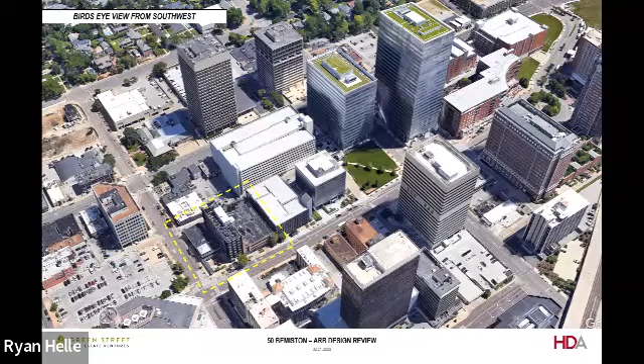Jerry had introduced with a couple of slides of just the context, and we can flip back and forth casually as we go through the presentation, but just the Clayton skyline, several views to reference towers that have been built or under construction. The site, big picture, bird's eye view from the southwest. So we've indicated the site dashed here in yellow at the northeastern corner of Carondelet and Bemiston. It's the existing Sterling Bank space in that corner plaza.

Zoomed in shot for context. So recently, I know Centene reclad this tower project and painted the existing precast parking structure. So we would be demolishing this collection of structures just to the west of that. The alley on the north end is where all the services will be accessed, off the northeast corner of our building.

The existing condition of Sterling is an access point, mostly masonry, pretty solid wall. As you step down, grade drops pretty quickly from the intersection of Bemiston and Carondelet as you move east down towards that Centene garage repaint and Centene office building recladding just to the east.

Our property line occurs approximately just right behind these bushes. There are existing on this corner 3 curb cuts to access 3 garage access points: one here at the northwestern portion of the site, and then 2 down along Carondelet, one here and one over here. This is a photo that is all kind of semi-combined.

So this is what we're proposing, viewing from the southwest corner, Carondelet on the right side of your page, Bemiston on the left side. I'll go through some of the massing concepts and sample diagrams of how we came to the structure you'll review tonight.

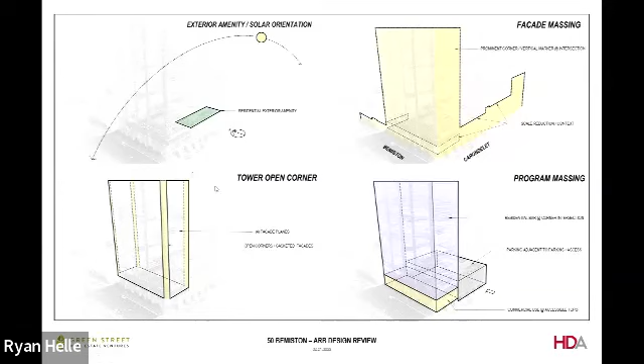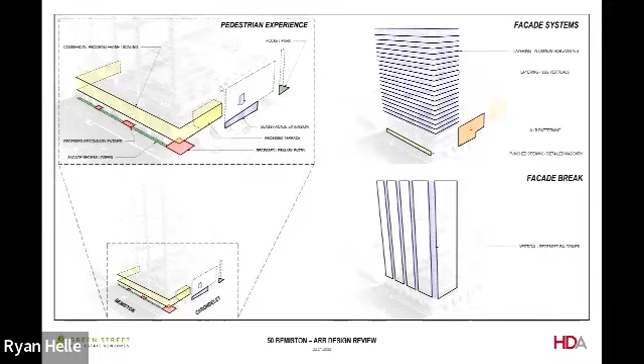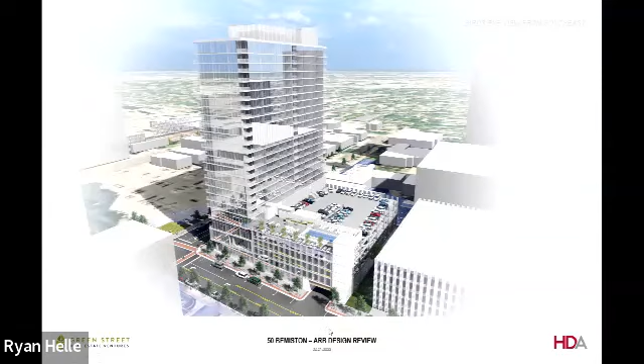This would be that pocket park location. And I think from there, Lee, I don't know if you want to continue.

And just... whoa. Sorry. Got it. All right, that's good.

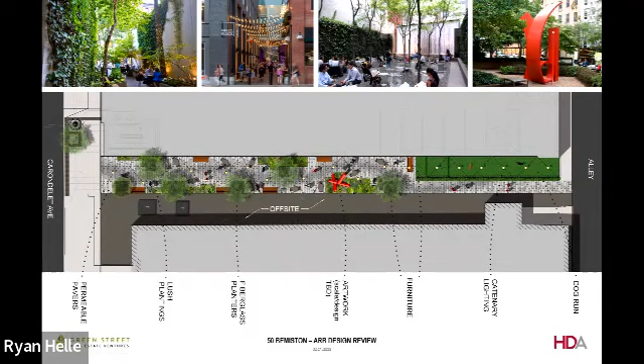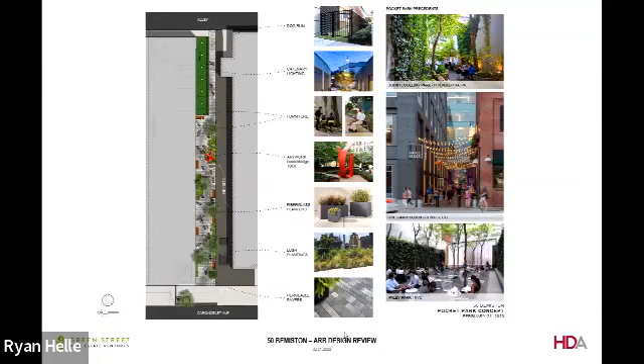Yeah, and I do have a PDF I could pull up and zoom in, it's kind of hard in PowerPoint. From my perspective, I think what you've done to landscape that 14-foot width is quite admirable, very attractive. I'm just trying to imagine the experience.

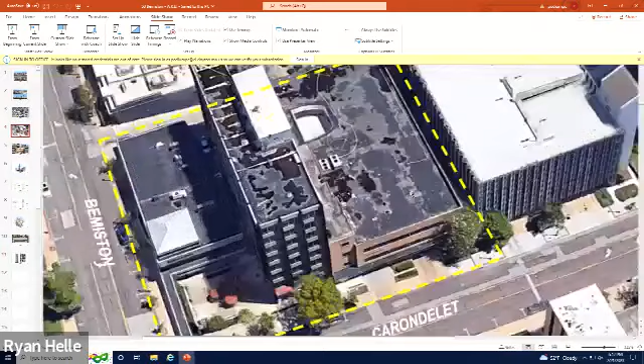If I walk down there on Centene's garage, I assume that's open, right? There are precast panels, it's partially open, same kind of rationale — first story and a half is solid, and after that it's all open, right? Correct. I think I might be able to see that in one of these zoomed in shots. Or maybe not.

Can you just speak into the microphone so the recording picks you up? Thanks. To give some sense of scale, for how wide that is, walking two dogs down, it's about the distance between this desk here, about 25 feet or so. That includes going up to the edge of the Centene garage. So 14 of it is the setback from our garage, and then another 10 feet is the setback from the Centene garage.

So it's about that sort of distance. To your point about the elevation, up to the second level, we will enclose the wall on our property and use that as an opportunity for a mural or art or a green landscape wall feature, sort of like this one showing here. So it is actually a pretty wide area, and it runs 186 feet back to the alleyway.

The example that's up here is from a couple different places. There's one in Philadelphia that's roughly the same diameter or same width. We tried to give some scale to it, if that was helpful to you. And then the next one down is a location in an alleyway like this that's in Denver, on what's known as the Dairy Block in downtown Central Business District of Denver.

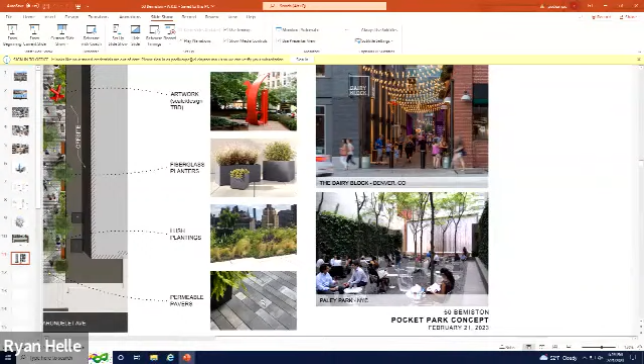And this actually is less than 25 feet wide here, but it all comes down to the activation of it, and how, from a property management standpoint, as we build the space out, we make things happen there. I think with Sterling Bay's corporate citizen mindset, ours of course, and Centene, it'll be a very active place.

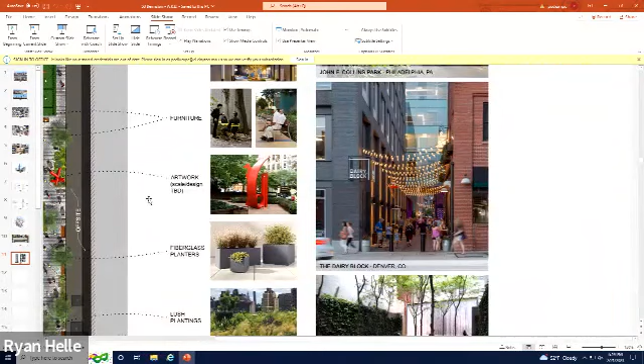I mean, like I say, it's admirable what you do, but when you look at that Denver example, there are entrances, you actually go into places there. Where you are talking about, it's like two walls of garages. You're going through, and there's no light that's ever going to be there.

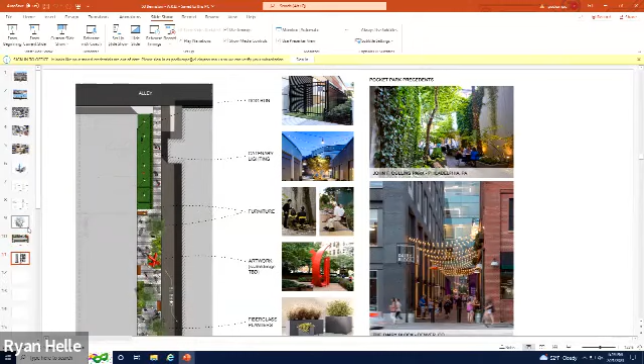I'm saying it's not going to be perfect, but you have to work with what you got. Yeah, I think we took that approach according to your plan — this is historically underutilized space, overlooked areas of setback in commercial developments that are usually just left as areas that collect fences or where people park things. We don't want to do that. We want to appeal to the city's walkability and create some park-like fashion too.

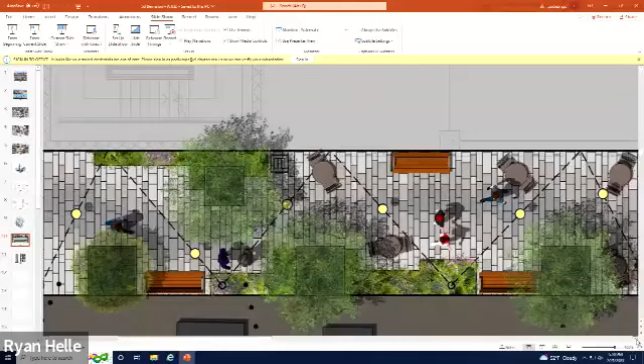And if I move to the garage — on the front on Carondelet, there, it's entirely a garage, right? It's not like Centene's garage buildings where it's first floor retail. Is that right? That's right. Our retail is on Bemiston. Right.

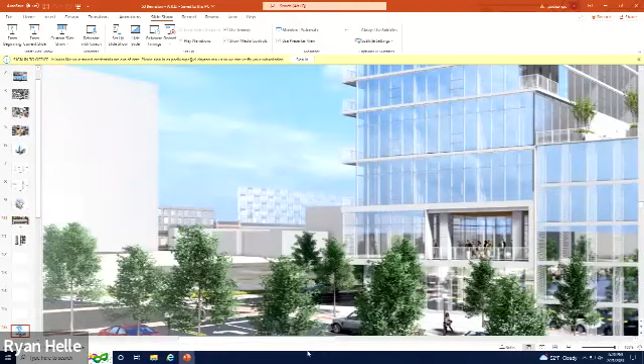So as I walk down, I went by Sterling's buildings, I'll call them, before I came here, and they're actually quite attractive to me anyway.

You know, it's nice, it's pedestrian scale, and I get all that. But in your garage, you put a new skin on it, right?

Looked at other iterations. Go ahead and go through those. So you have two garages adjoining one another, one owned by Centene, one proposed by you guys. And there's no way to make that too pedestrian friendly.

I mean, it's just going to be, I know you're trying to cover it up, I guess, but it's kind of like a pedestrian desert there for a while on Carondelet, whereas right now, we don't have that. I just point that out because I'm trying to understand your project.

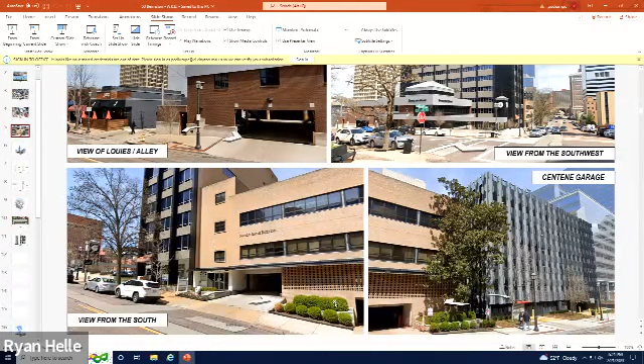I would say, if you look at what's there currently, it is a lot of solid, a lot of parking garage entries. Right? So, other than Sterling, they have the corner open space and the retail bank, but there's a lot of solid there too, especially on the alley side with garage access. So basically our whole facade along Bemiston is glass lined retail, an open corner, recessed corner with retail.

Reality is a lot of these buildings, you just can't line them with retail. And that's where what we did on the southern facade as a gesture was took one, clad it in glass and not precast panels like the adjacent garage has. So something that will reflect surrounding context, the sky, and then we added some fritting and detailing to make it more interesting. That was the intent.

But as we looked at the existing building, there's a lot of solid there, just solid masonry. So we thought with just garage openings, glass pulling it down to grade would be a better look at that side. And then if we could introduce - the existing building is built on the property line, we can't rebuild at that edge, so we have another 15 foot. So between that and the space between Centene's garage and their property line, which is 11 feet, approximately 25 feet, we thought we could make something interesting.

And hopefully, with Centene's help, they will allow us to put more greenery and more space or more softness in that alley. At this point, they're intrigued and interested to work with us. We're just introducing it as a concept to see if it's worth it.

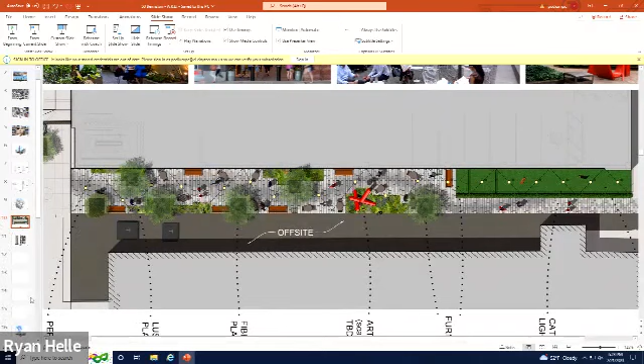That's why we have concepts like - not your project, but other projects - the second floor is stepped back to make it more pedestrian scale, so you feel you're not going along a wall. And then I look at your project, it's another glass.

I just want to flip to that garage screen again. So here's what's the existing condition at this corner. These two buildings and two access points to the garage and the masonry. And here's what we're proposing.

So one access point at the low end of the site, some glass fritting. And the second layer or third layer of glass would actually have diffused gray material on it, so you wouldn't be seeing cars. From the garage side, you would be seeing basically glowing panels, but from the pedestrian side, you wouldn't be seeing cars because it's diffused glass.

And like I said, we pulled glass down to street, so at least you're walking along Carondelet, there's reflection and texture more so than right now where there are some planters out there. Can you go back to the previous picture?

So as I walk up the street there, I go past the garage. Does the building recess in at that point? Not on this face, no.

Well, up above, on the second story - this is Sterling's corporate headquarters. They wanted like a terrace space, so when they host events or get-togethers, they could spill out on that from there. We're still working through the planning.

Right, on the second floor, ignoring that punched-in space, which is nice. I think there was - is it just a vertical wall I'm basically walking by?

We talked about this recessed planter. For now we're showing these little objects. There was potential for that public art component either to occur at the alley side, or if we did these intermittent pieces along that western facade, that was another option.

I know when we went through some of this application process on some other developments that we had talked about, like we would work with a commissioned artist that worked with Clayton to get something you were all on board with. So that was one thought as a concept.

I mean, all these changes to all these additions, like to give texture - and maybe you set back a foot here or there and you try to break the line a little bit. I mean, to me, and you know, it's always easy - to me, those are all minor articulations to what's basically a large rectangular glass building.

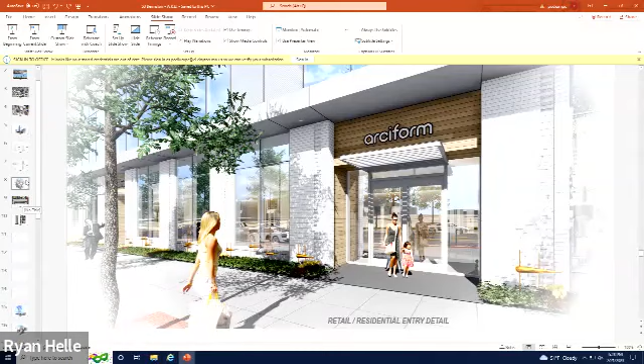There is, I mean, obviously Sterling has their retail entry at their corner as you move further south. But again, our whole facade along Bemiston will be glass and retail and not brick and garage entries.

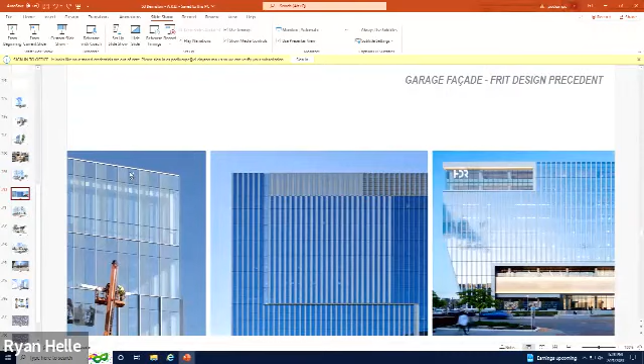So the fact that you're taking down older buildings, I can understand that, but that doesn't mean that a glass building is automatically going to be better, having how many stories? Twenty-five. Twenty-five stories.

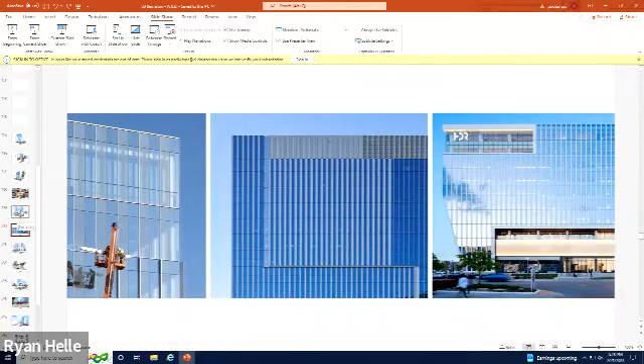You know, Clayton is something I would like to see as desirable to walk around. I just don't want to pass one. I'm not saying your building is boring right here, but there's so many boring buildings in Clayton with glass and just vertical lines, and I go to other cities all over the country and all over the world and I see interesting looks, and it could make you feel good walking with a friend as you go to lunch or somewhere. And if all I'm doing is just walking past walls under the guise of nice looking glass and people living in them or people working in them...

I really take a hard look - that's what I'm trying to say. I really take a hard look. Is there something we could do a little different to add a little flavor, to make it more pedestrian friendly? And I'm not the architect, but it's kind of like I know when I see it, and I just have a hard time seeing it here.

But you always have the last word.

Obviously everyone's got their own personal opinion and aesthetic. And I think the other thing we work with are rents that you can get in this market and budgets for construction. I think we first visited you all like 18 months ago. So we have been adjusting this design based on feedback we got, but also constructability and what this market can pull off. And we think we've pulled together a really great version of that for tonight.

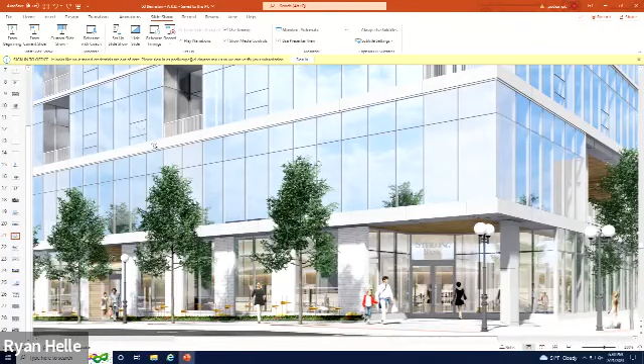Well, listen, I think you guys do great work. And when you bring Green Street's name in here, I always say, oh wow, I'm really in for a great show, you know, because they do great work. And I'm looking at this and what I see is another, I feel like I'm looking at all the glass buildings in Clayton. And that's not necessarily a compliment.

I mean, you know, Phil, you want to say something? I think a couple of things. I'm Phil Holtz. What we're doing is bringing people here, which creates dynamics that you don't have. And I've done a lot of work in the city, which you're probably aware of. One of the biggest challenges is in a city like Clayton, where you had a population before COVID that was probably 47,000 people. Most of them left. You ended up with something around 17,000, I think that was the number. So what we're trying to bring is street activity, balconies, and character to the neighborhood that's not there now. Because when you walk by, in fact I parked down there this evening, it feels like a very cold structure, because it is. It's tired, it's worn out.

And Sterling knows that too. They need a different perspective. They want to be here as a corporate citizen. So integrating their retail bank, their corporate office with a balcony, to creating the streetscape that has some texture to it that's soft in terms of the plantings, the trees, how we're changing that. People going in and out of this building by the hundreds changes what's there today.

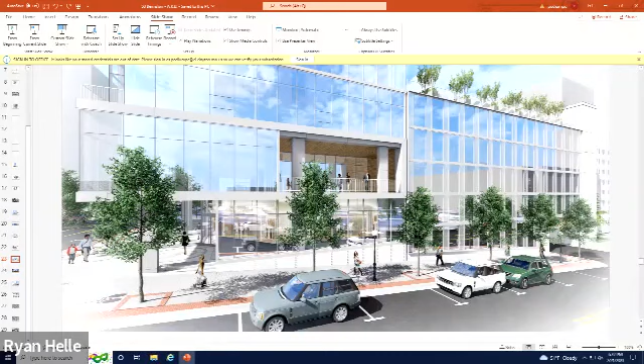Can you please speak into the microphone so that it's recorded? Thank you. I think we're designing this for city standards, I believe, aren't we? With all the planters, as far as the tree planters and so on, yeah. Okay, the planters, but you can't walk across those planters comfortably. I don't think we intend you to walk across. Okay, what is the distance to the building, to the planters or to the planting that you've got in front of the building to the brick?

Look at the cursor here. Yeah, from the brick there, edge of the building is about 8 feet, 8 feet, and then another 4 feet to the...

Okay, because that really impacts the pedestrian experience. If you've got to focus on who may be coming in the other direction so that you step aside and you don't walk into each other. Or if you're walking two people and your rendering shows father and daughter maybe, can they truly walk side by side? That's pedestrian experience.

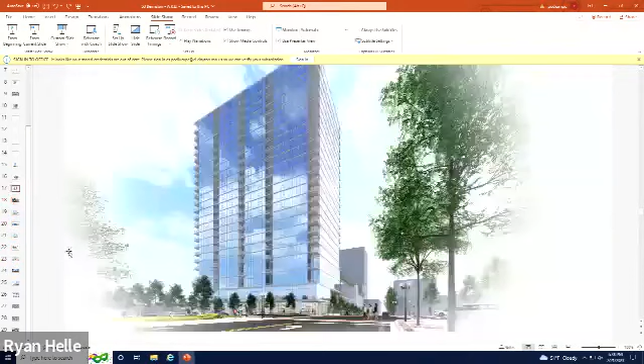The plan of the pocket park, you did show that to us. I love pocket parks, I think that's a great idea. But it's between two garages, so I've got the exhaust from both. And the Centene garage is far handsomer than your garage wall will be. I mean, from that view, it's going to be a dark space. You're putting lights in it, and yes, you can put lights during the day to brighten it up.

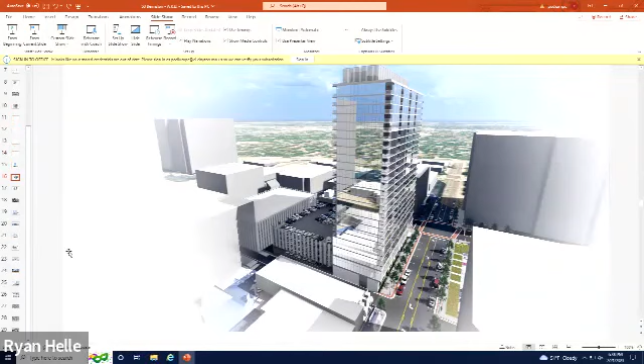But what you see on the sides as you look up - on one side, the Centene building, that parking garage wraps the facade around all four sides. Your garage has 3 exposed sides and 3 different elevation treatments, which I find problematic because rarely do you really see something just head on. Usually you're seeing it at an angle. So you're seeing that as you walk.

And the way the pocket park is designed, that can be a shortcut. Instead of walking to the corner of Bemiston and Carondelet, you can shortcut through.

So that bothers me. So, question for the park regarding the pocket park: we can't build anything there, so it could just be concrete. Yeah, we can do that too. But we want to make it nice and improve it, make it an asset to the community. Maybe the nicer section only went back 30, 40 feet. I think there was feedback that said it was desirable to have a connection up to the alley due to some future development on the north side of the alley, but we're trying to make it nice and interesting. Again, because of the easement, it could also just be a fence and asphalt.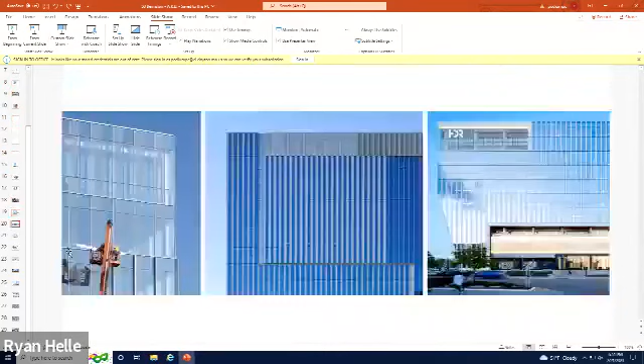I think I'm in agreement with everything that's been said before. I do like the idea of bringing people into the city. I just think the building is a little underwhelming. I mean, it's definitely better than what is there now - let's not miss that point. But I do think, like the thought behind what you have on Bemiston with the punched openings and the texture, that to me creates pedestrians wanting to walk by there.

I think what you have along Carondelet, however, people are just passing by. There's no interaction with the building really. There's no, I mean, even planters or something needs to be there, because right now all that is on the same plane, right? Except for that setback on the second floor. Is that right? There's not even any dimension really besides the opening into the garage. There's like mullion cap extensions around this glass.

Garage frame, pretty much it's on the same plane, right? Correct, like all this glass, that first surface is all in the same plane. And then you're just walking by. There's no real interaction with that, with the building. I don't know how you solve that with your retail, the bank and stuff, but to me, there's no pedestrian interaction at all.

And then the pocket park, I like that idea, but it's so hidden. I don't know if your stair tower with the garage, if you set it back, so you almost get a peek of it when you're walking down Bemiston, might bring people in that are just of the public and not just the residents of the pocket park.

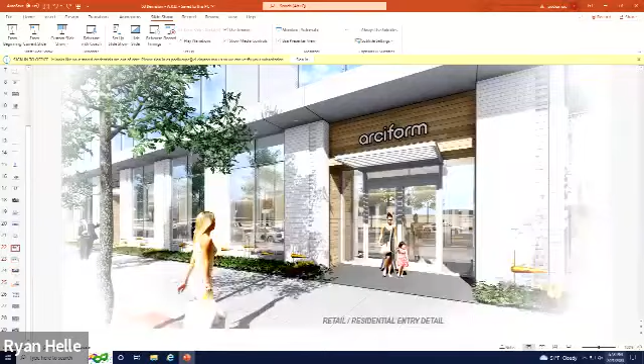And I noticed in all your renderings it's green, but that's not the case, right? It's going to be more pavers. There's no grass being grown there, it's just plants and planters. Is that accurate? We didn't represent the park in these images, we just said reference landscape drawings in the package at least. So we just kind of always identified that the park was the landscape realm, if that makes sense.

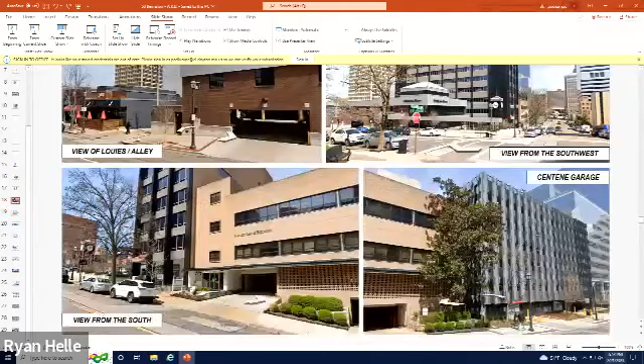Right, so let's say Centene is a no-go. What does that look like with that transition from your property to theirs in that space? I think we would try to enhance that with some green, because right now it's just barren. Like on their property? Well, if we could, maybe along the path, pull that paver back a little bit and plant the entire length of the park. That way there's at least a continuous buffer there.

It could also be vertical pillars and that sort of thing to define the space better. And then on the other side, it would just be concrete, bare dirt.

So if they don't go for it, that's a huge impact. And then also as far as the public art, I feel like that's not very public when it's in between two garage spaces down an alley. If we want to create something that is a public benefit for all to see, I think that needs to be out more in the forefront of the building, the pedestrian experience, not just tucked away.

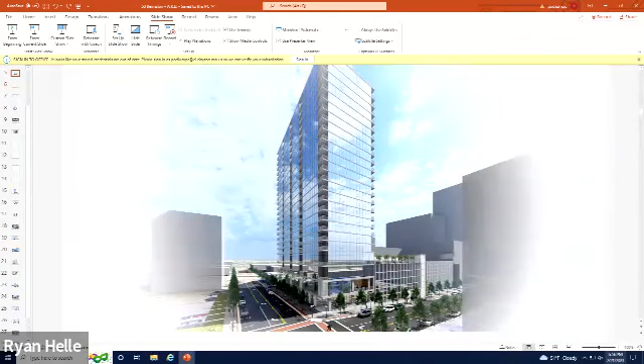Yeah, there's just nothing really there. There just needs to be a little bit more interest. I mean, this comes back to construction - it's not going to be a twisting tower or multifaceted. It's just not. So if that's what it needs to be, I don't know what to say. It's a box, a rectangle, it could just be a big glass box. But we've placed recessed balconies. We've been thoughtful about the actual glazing detail being applied to the box.

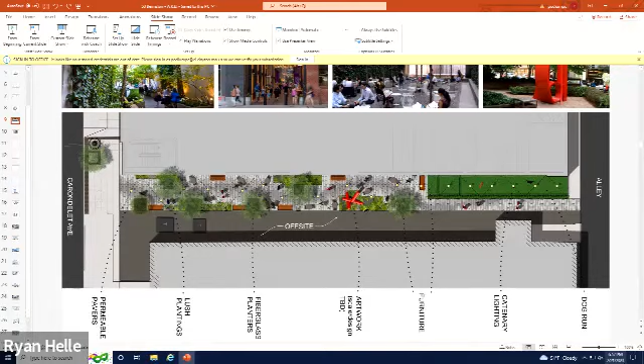I'd love to see, in your minds, what good architecture is. It'd be great to have anything even at the top of it to kind of anchor it, I think would help - just something to differentiate the 22 floors in some kind of way. I think you've done a smart job on the first 2 floors with adding the architectural details and signaling from an architecture standpoint what is what. I just think the remaining floors, there needs to be...

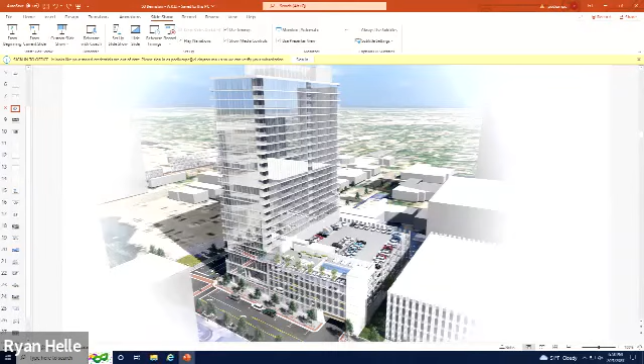Something - if we cut to the chase, we're not asking you to make a spiral building or something you'd find in Shanghai. But there's a way to take a glass building and make breaks in it, punch a hole here and there - you've got these recessed balconies which are nice, and you're trying to put a nice skin on the building. I hear you, and it does, but...

That's all we got in Clayton, basically, and we're really trying to push the envelope a bit - not to start from scratch and knock it down, okay, but to use a little imagination and try. If I walk past the building, I would like to say, God, Sterling's building, that's really something. Or I could walk and feel like I'm not walking along a dam a little bit, that there's more breaks or something a little more interesting to the building.

I'm not the architect, I'll put Ellen on the spot. But there's got to be a way, and we've sent everybody back to come up with some changes - not to tear down the building, but improve it somewhat, so everybody is proud to see it in Clayton.

And I agree with one thing - the million dollar issue is I want to see pedestrians on the street. And for that, you need a lot of mini destinations in Clayton. It could be a little park, it could be a restaurant, whatever. But we want you to add to the solution - be one piece of the solution, and not just be a building and say, well, it's the community's problem. We want you to be part of the community and solve the problem with us.

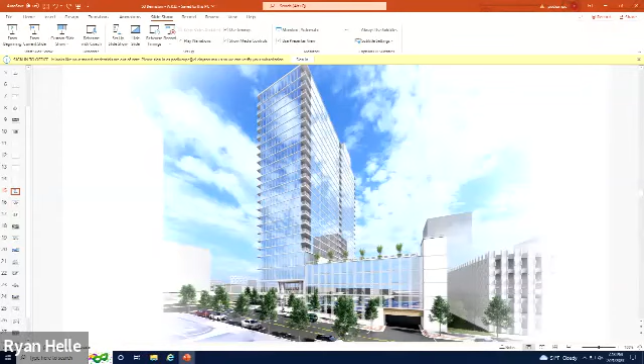Yeah, I agree with Bridget. When I was doing my homework, I knew nothing about the pocket park—it was mentioned, but there was no description. What is it? What are you thinking of doing?

So I basically downgraded you from what the staff gave, from a 4 to a 3. But if you come back, I think you could get a 5. We know there's got to be more description of what it is—the width, how does it feel when you're in there.

What do you give it? I agree with Helen, I was just going to say that—and knowing if Centene's going to be part of it, because I think that will really change that space and make it something people want to go to. Otherwise it might seem a little odd to have half of it done and not. So I think that's a key factor to get a 5. Sure, I appreciate that, and we'll endeavor to try and do that so we can get a 5.

One thing I'll add to what Phil said earlier—we look at the pocket park as beneficial to what we're trying to do with this project too. But there's another way to look at it: consider that it's an initiative that might inspire other developments to look at setback areas, areas that are otherwise overlooked or not even thought about, as far as doing something creative in activation and beautification.

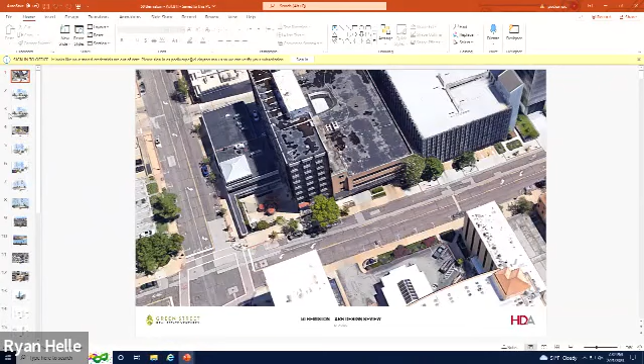One question is on the southern facade, like the garage. We could clad it in metal, we could clad it in precast. To us, a thoughtful glass pattern that's timeless is much better than either one of those options. So is it brick? I'm just throwing things out there, we don't have to talk about it. As the designer, that's got to go back and come back to you all and make a major investment to make all these changes and then say, well, I don't like that either. That's why we need to get a little more response.

So one thing we looked at on the southern facade was we could clad it in metal or perforated metal, and to me I don't think you all would like that. The other thing we talked about was if there was a green strip along the base. There's no retail there, and there are existing curb cut planters that do come out beyond the property line, but that would be something the city would have to buy into.

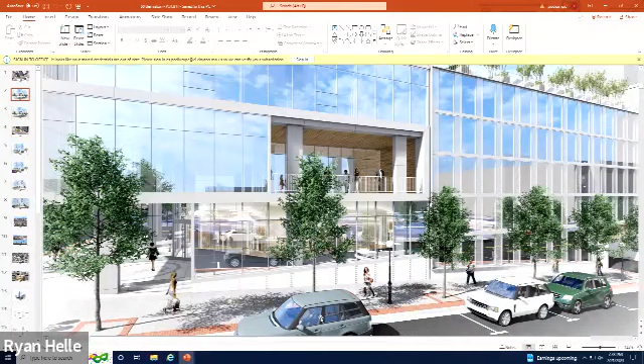So if I go to the bird's eye view, I've identified here that yellow marker. All these planters come out beyond their property line at that blue edge, so if the city would allow us to do that, it could help soften up that edge. So again, flipping from what we had previously to another proposal, the walkway is a little narrower, but you have a strip of landscape planter.

So that's one potential solution. And again, I just want to get your feedback because we have the difficult task of going back and coming back, hoping that you like it too.

Would the planters be on the sidewalk? They would project beyond our property line, yes, but there's precedent for it already along that street where there are already planters beyond the property line. So we would just be taking that curb cut that exists and pulling it up. But again, that's something we abandoned because we thought you wouldn't appreciate it.

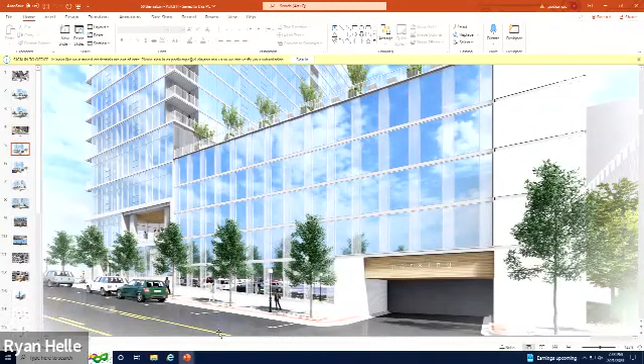So that's one look. I'm going to flip through a couple other options real quick. So this is the current condition where we know you all want retail there. And if you saw the plan, there's basically some parking spaces beyond that in a drive lane. There's no depth for retail.

And we thought, well, can't you make depth for retail? You just carve out a box. So that's what I don't know, just saying, then you add a whole level of parking structure that's $3 million. And it's just major impact.

So one thing we did talk about was, rather than putting retail there, could you create a little recess that had a landscape strip pulling up into kind of an organic bench? And then we could use maybe the wall surface as our art installation. So again, it's not activated with retail, it's activated by an art installation.

So you're covered, you could sit there and have a cup of coffee from the cafe we're providing along Bemiston and come down and sit here. And at night, it would activate the street. It would be illuminated with bright colors, illuminating the white brick. But we abandoned this because we thought the pocket park would be more attractive.

So was it you, or is no one buying into this in lieu of the pocket park? Well, potentially, yes. I mean, the reality is that pocket park has a price tag on it, just like this would.

And it's kind of like, well, what does the city—and again, this is where we want your feedback—would we rather have glass coming down, or this recess that becomes our art piece? We can't have art pieces everywhere.

Well, I don't want to lose the pocket park. I mean, I'm just speaking for myself. So we viewed this—

—as a pocket park. It ends up being about a 16-foot recess into the building that's covered. And again, it could have an organic bench cut out of laser-cut aluminum, and that becomes part of that art sculpture. And then the linear strips in the brick are lights that could change color. So again, that becomes our art piece. It's not just a sculpture on the corner of a property line.

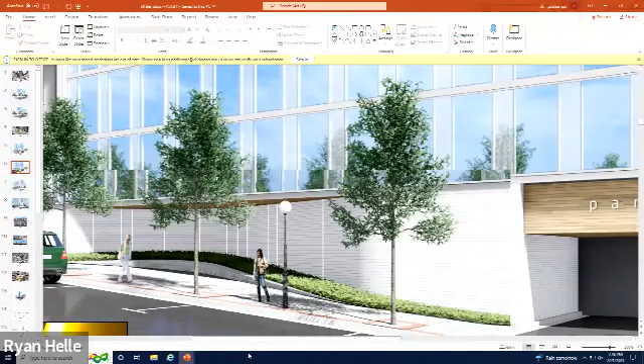I think this is better looking than the glass. Getting feedback is great, but at this point, it's just—I don't like the building. And like I said, I've been to multiple ARBs all over the Midwest, so I need something more than that to go back.

I mean, we have provided you feedback. We have said that most of it's been on the pocket park, and again, we want to find that's been the biggest public benefit. So I feel like we have provided you feedback.

I mean, quite honestly, the World News Building looked a lot like this. And when we provided feedback, they did some architectural details that were different.

That was the feedback that was provided, and that's what we're talking to you about. I was the one making those adjustments. I would say this, well, I mean, I don't.

Here's another example. If it's not saying make it a brick building, is it just adding detail, like pulling the frame out? I'm just clipping stuff together while we're talking.

Back to the previous slide. So that's what we had previously, and then we said maybe that brow gets the indentation. Go back, I'm just zooming in so you can now see it better.

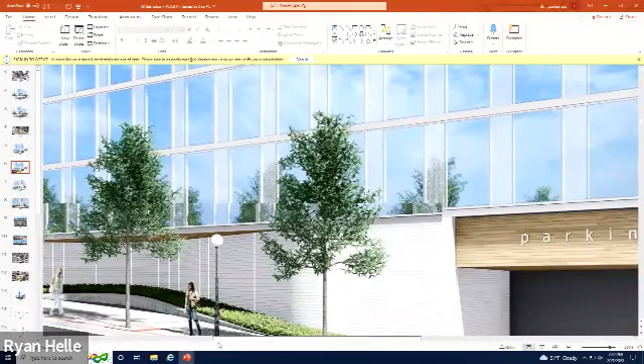There's the wall with the glass. Where's the wall of glass? It was right before it. Now you see that - imagine me walking by that and walking by this.

This is a much more breathable space. Yeah, and this is great feedback. That's why I was trying to clip a bunch of stuff together.

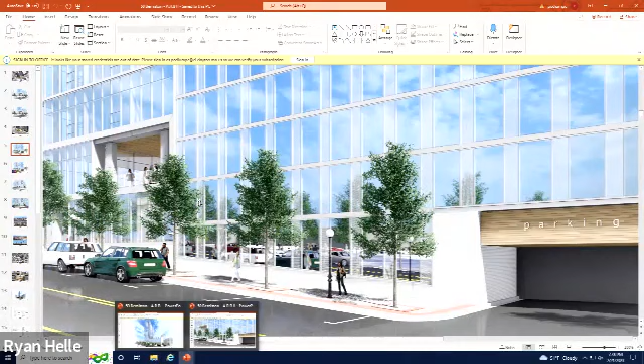We'll say, well, we got over here, if we could get this to make the sidewalk area and the public area give it a better benefit. This is a public benefit. You've probably earned, for me, I can't speak for them, you've probably earned yourself some more points just by having that.

10 points. Oh, probably 20. I apologize, I don't want to come off as trying to find the solution while we're all here. If you don't mind, I'm just telling you some of how I react to these pieces, that's all, because we want to go back and see if we can make adjustments.

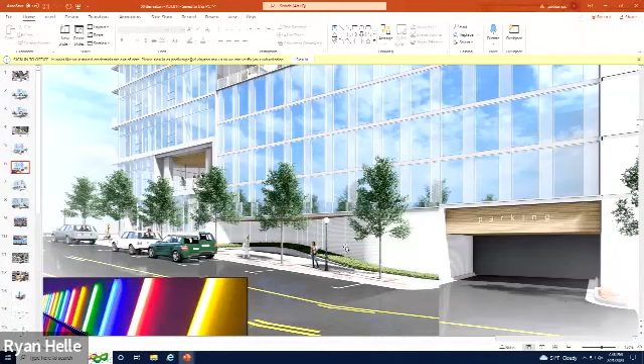I don't want to sacrifice the alley, and I'm not the greatest fan of the alley, but it's at least something, you know? I was trying to think what else.

So this was another example, is like we show that metal frame, just by pulling it out and giving it more projection, and we could test colors and do other things, and maybe this second floor is masonry or something else.

Is that, we just don't want this much glass? Is that kind of the thing? I think something - I like this, I mean this is a change for sure, but I think on the upper 22 floors there needs to be something else that's just not so, it's the same.

Yeah, you know, if you want to add like this brow, you know what I mean? Just somewhere, whatever architectural detail you come up with, but there just needs to be something else added with it for those other 22 floors.

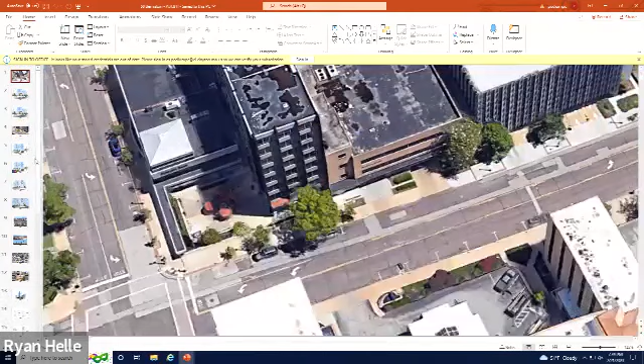I think that's when we're getting like that box feel. Yeah, and that's okay. I think what it'll come at is we'll probably lose some balconies and add maybe some architectural detailing in to offset.

Does that make sense? So we started with just like, hey, we could make this beautiful, clean box that has equally proportioned recesses throughout that western facade, and that was enough. And if you're saying it's not, that's great feedback, and we can take that and adjust.

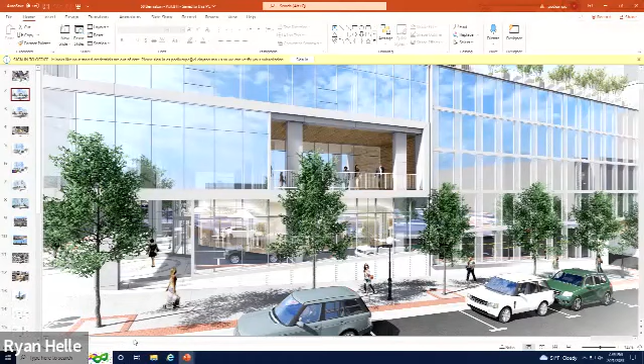I think what else - I was putting the truth of the matter together with the glass, and it's so vertical coming up to the sidewalk. And I know you say you're breaking it up, and you do break it up, which is key always. But it's still basically an office building to me, but you did break it up a lot.

You do have balconies, I'll give you all the credit. Thank you. And they're recessed balconies - yeah, in a tower like this they're very expensive moves. So we can certainly eliminate them and do something else, and check what else we can study.

Well, I mean, I've always liked the balconies. I think people appreciate balconies who live in those buildings.

Have you ever - and again I don't understand the expense, of course - but you have the recessed second floor space for the Sterling Bank employees. Have you ever thought about recessing another on the other side?

That would be - actually, maybe we could do something public, like something public for the retail. If you have a retail space and it's a cafe, then people could go upstairs and sit upstairs in a recessed balcony. I don't know, something to add, because on this strip, the reality is the parking structure and the parking demand for a building like this.

I don't have the plan pulled up, but this thing's packed full—one, Sterling, we have to have the retail location. And two, the core for the building, the lobby, we have 1,800 square feet of retail. It's not just the Sterling Bank retail, we have another retail plan down here, and then everything else is gas meters and everything you need for the building. There's nowhere else to put it other than the alley side, that northwestern corner. So it's just a program piece—there's no room, we struggled to fit in that 1,800 square foot retailer on that level at the sacrifice of residential amenities.

Sorry, I'm flipping between presentations now. When we planned those entries, we recessed them so they're covered and protected from the rain, the residential and the retail.

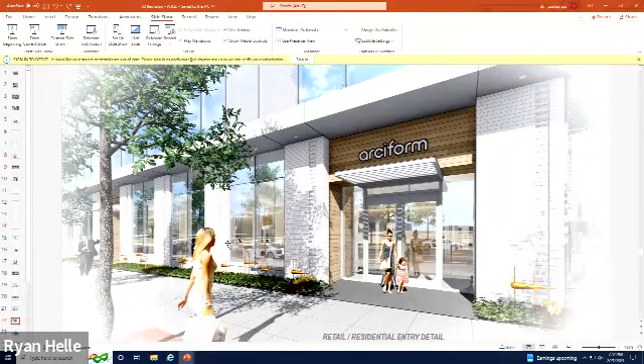I think you've done a good job of expressing your needs, and the things you're limited by—not just expense, but structurally.

Here, I'll pull this up—this may be the last one. If it'll play, we'll see.

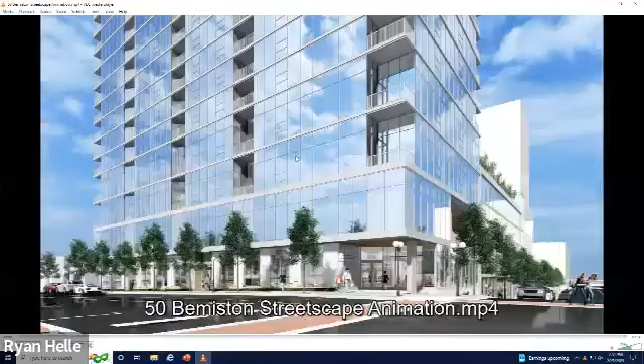So this is a little more than just stills. Again, I looked at maybe that brow gets extruded a little bit more, maybe there's more detail, maybe a different material—we can definitely investigate that. But at the pedestrian level with the 15-foot floor to floor, that's where we started looking at adding these masonry elements, punched openings, so there's a different texture at that pedestrian base.

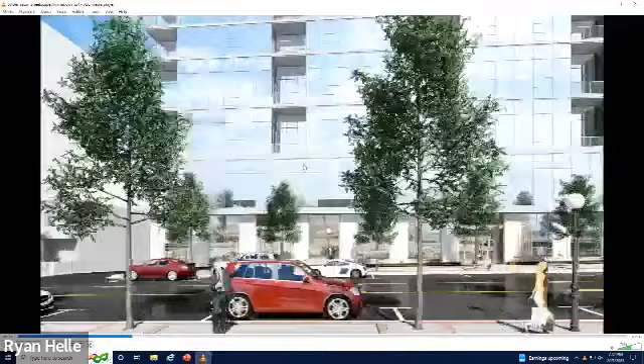Same thing with this commercial second level piece—we could extend that brow. There's more shadow, more depth to the building.

As you work your way over, these little golden icons represent that it could be some linear art installation—so if it wasn't at the Pocket Park, it was maybe along Bemiston. We added architectural detail and interest, recessed these.

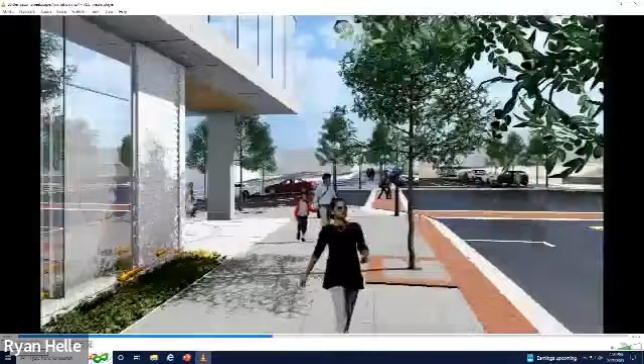There's soffits with lighting, so it's not just a glass building, especially at the pedestrian level. Sorry, I'm trying to figure out how to drive this thing. Then again, at the Sterling, we have other additional materials—we embossed our emblem and have a higher upgrade flat work finish there at the corner.

Let's see, I can pull up Google Earth. So this is as we work around the corner.

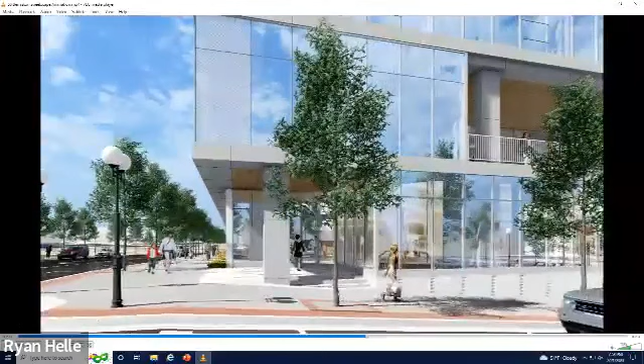If we were allowed to install that green space, it kind of softens up the base. We're being thoughtful about it—this could just be a big solid wall of brick, but we're adding detailing, reveal, and shadow line. As you look up as the pedestrian, you see this second story space with another material transition, a recess at the corner.

I know we've seen this in some of the stills, I'm just reiterating as we talk about the animation. This is potentially that location where you could have that little recessed art installation. So it's not a retail spot, but it could be pretty awesome at night and during the day, just a spot to get covered if it's raining as you work your way down mid-block.

It could be a signature piece really for that southern facade. As we turn the corner, we have a masonry element, a vertical piece, kind of a termination move at the end of the southeastern corner.

We'd add material and detail to that parking entry point. As you work your way up—I'd have to test and see how wide this is, I can't measure it off this model—but this is the point where this is all city standards. There's also an accepted standard where this slides over and the trees move out, and you could add a planter here and maintain your walkway if that's something you're not opposed to.

Does that make sense? Basically, there's two standards: one where there's an 18 or 24-inch brick strip, or this planter gets shoved right up against the curb and you could add a planter along the building. But we didn't think you guys would want to do that.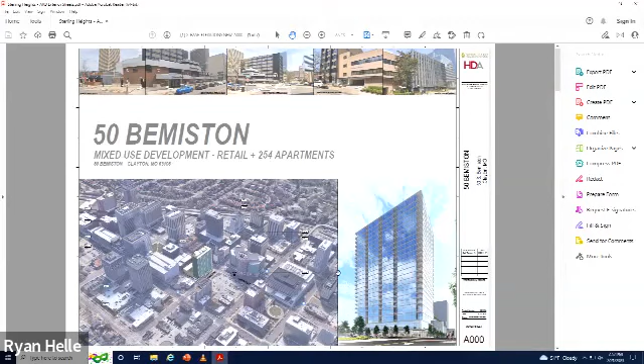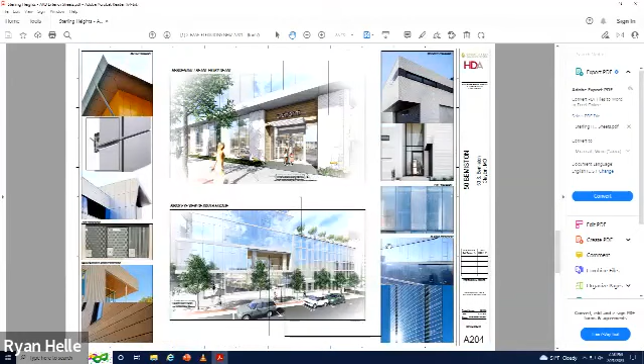So there was additional detail requested for that garage screen. Let me flip, sorry, I'm used to driving a different type of software. So currently, this is a little vignette of how that glass would work. There'd be 4 surfaces, right? The 1, 2, the inside face, 3, and 4.

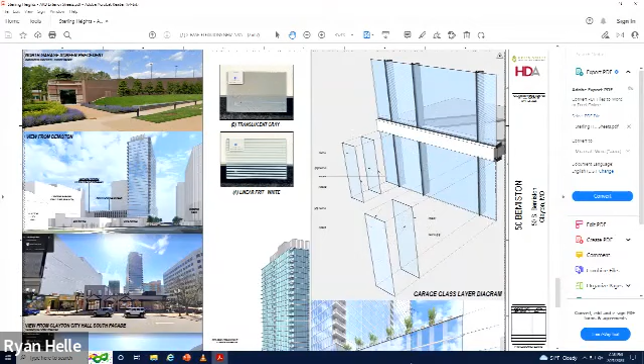All the third faces would have this gray translucent finish. It's not a film, it's a baked-on ceramic on the third surface, so it's protected — you couldn't go scratch it from the garage side. All the surfaces would have that, so again, you can't go up to that glass and see a car bumper. It's basically diffused glass that allows light through. You can see through it, but unless a car was parked immediately against the surface — pull it a foot away and you can't. So the idea is when you're on the garage side, that face is glowing.

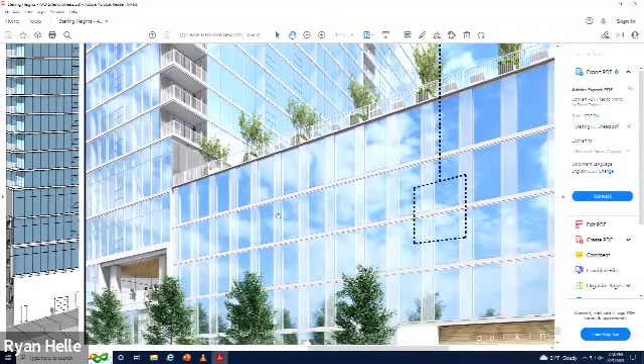So all the glass would have that on the third surface, and everywhere else would have this frit, or every other panel as part of this. So this was kind of a vignette of that, if that's what you're asking, Anna. The other options are big precast concrete bands that are painted, which is adjacent just to the east of us, or some metal structure. To us, the glass felt better, and honestly it's more expensive than either of the solutions I just listed, so we thought we were doing something nice there.

In those architectural drawings, it calls out a vinyl screen on the garage. So, at the first concept ARB when we talked about this building, one comment that came out was it looked like two buildings because we had a building with punched openings and glass. So we went with all glass because that was some of the feedback we got — we wanted one unified building. The other thing was that they wanted to see garage cladding along the alley.

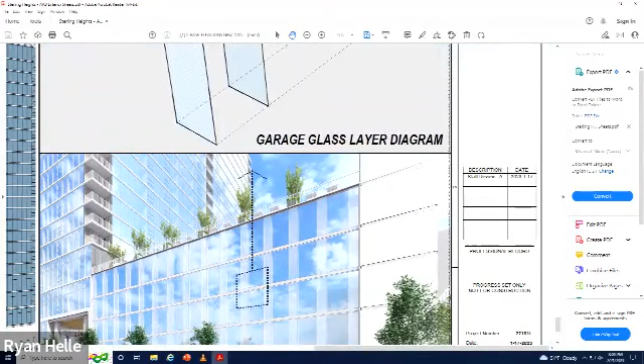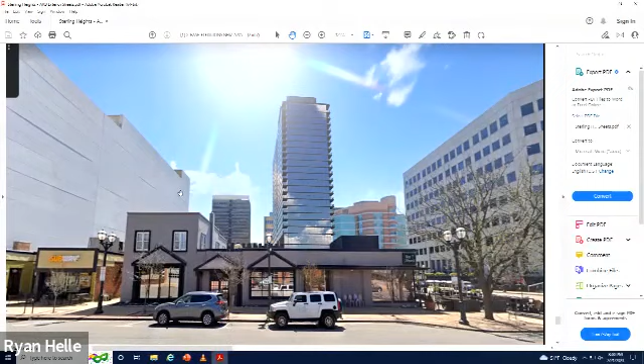So what we looked at there are these panels, and we provided these views at the request of the city planning group. It was basically a shot from here to see what you would see. So this is standing just outside City Hall, looking south.

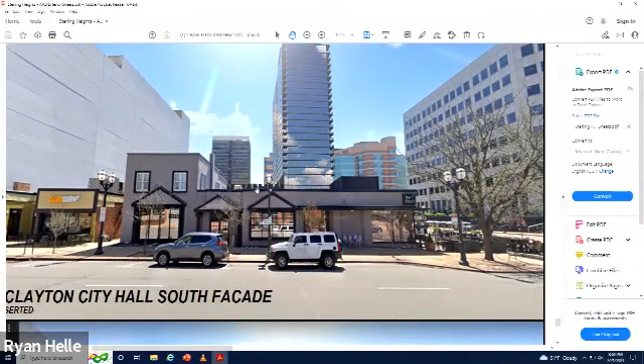So the reality is you view these panels from 250, 300 feet away, and you just see the tops of them, unless you're walking down the alley. That's what these two views we provided were about—this is further back, so the further back you get, a glimpse. This may be from 400 feet away.

So what we talked about using was these vinyl mesh materials that would be applied to a frame. Here's an example of it—right outside the $100 million Olin School of Business over at WashU, on their garage cladding. Jamie Kolker, the campus architect responsible for all the East End transformation, and we worked on this together. It's a vinyl fabric, but it's a nice product.

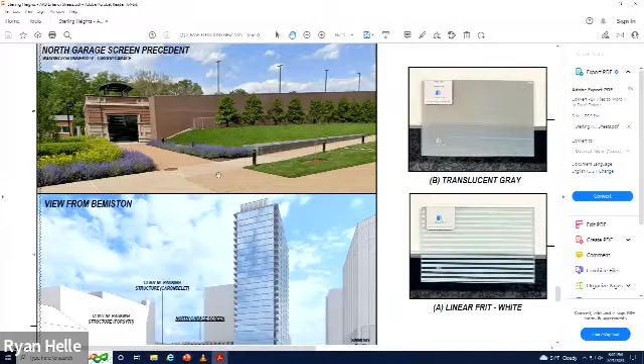So for the garage screening on the alley side, we wanted to come up with something thoughtful, but also not glass, because at some point a building could be built where it occurs, and we've clad a garage in glass. So that was our rationale—we're doing something nice and thoughtful that may be covered up someday.

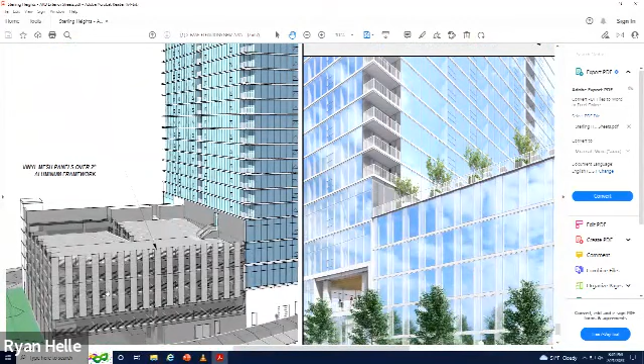And there's just some details of how it would occur. We basically pulled the pattern, and the openness is all based on the garage breathability. So rather than just having an open garage, we provided a feature across the back of it.

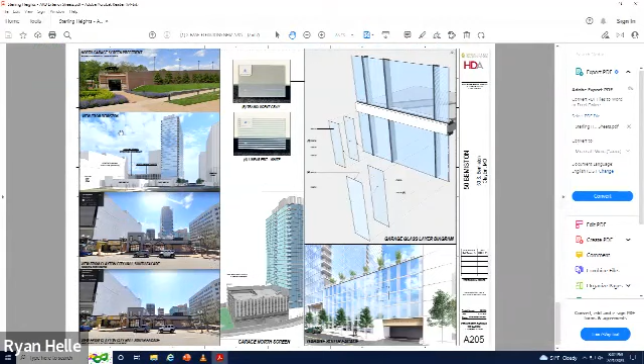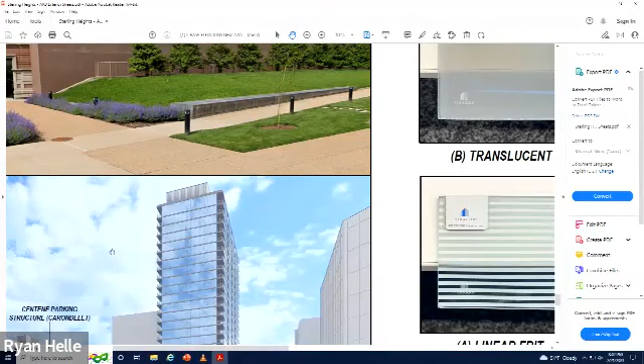Anything else? I think that's it. I just want to get some additional feedback, because as one of the team members, it's got to go back and come back here with you all. I want to make sure I'm coming back with something that's closer. I think it was very helpful, very helpful, so I appreciate it.